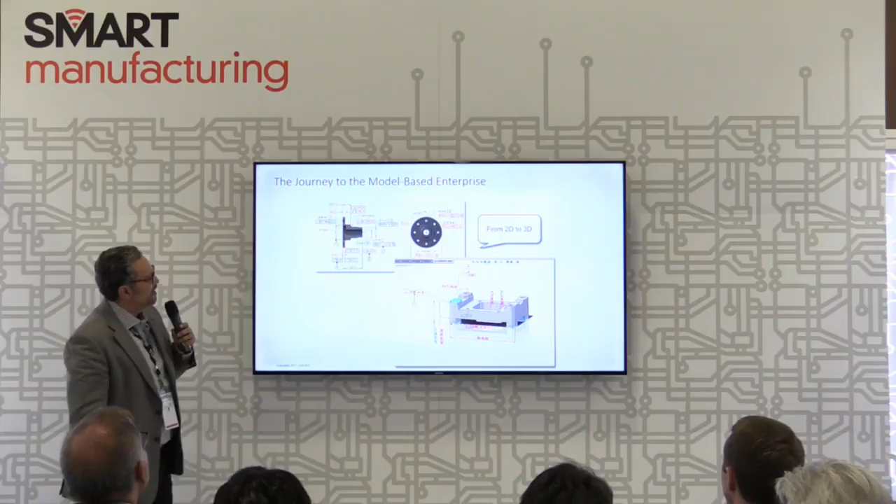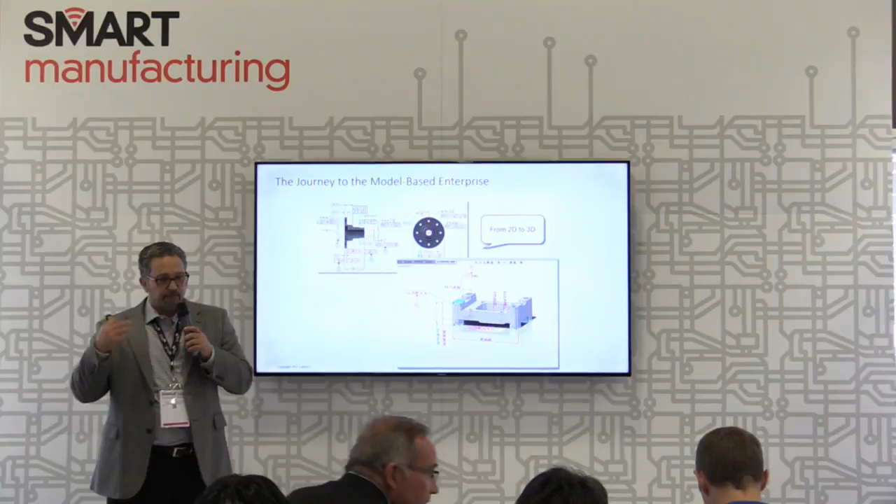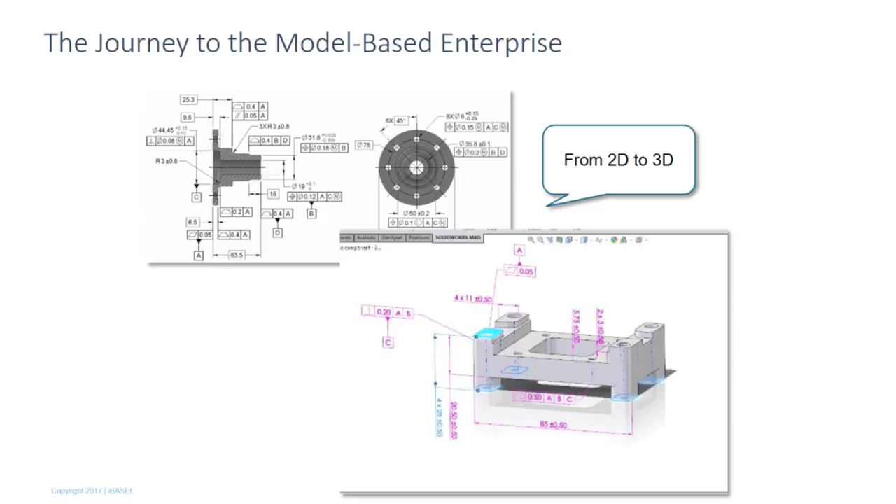All this fascination with the digital thread is really about leveraging 3D models. We have been working for the last 40 years with processes that were really designed around blueprints and 2D drawings and sheets of drawings and rolls of blueprints. And we've laid out a journey, a plan to leverage 3D model content, not just in engineering, but throughout the enterprise. And we're still in that process of going from the drawings to model-based definition to a model-based enterprise. So we'll be more specific about how we do that.

I went too far. Okay. Not cooperating with me. Okay.

So the model-based enterprise has been defined by aerospace companies to be a journey. A journey from those drawings to the model-based definition, the model-based manufacturing, all the way to the model-based enterprise. And along the way, we have more use of the 3D model, and we have more structured handover of that model-based definition from one department to the next in that digital thread. So let's talk about what that looks like.

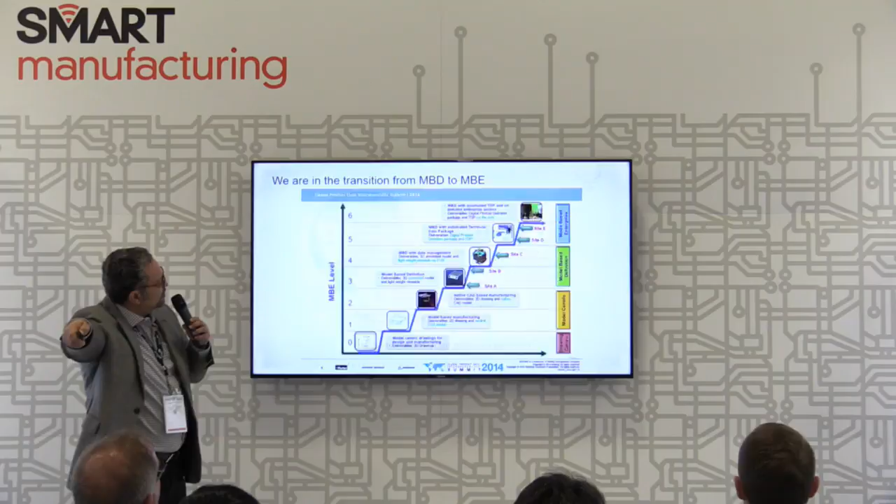If my pointer cooperates. Okay.

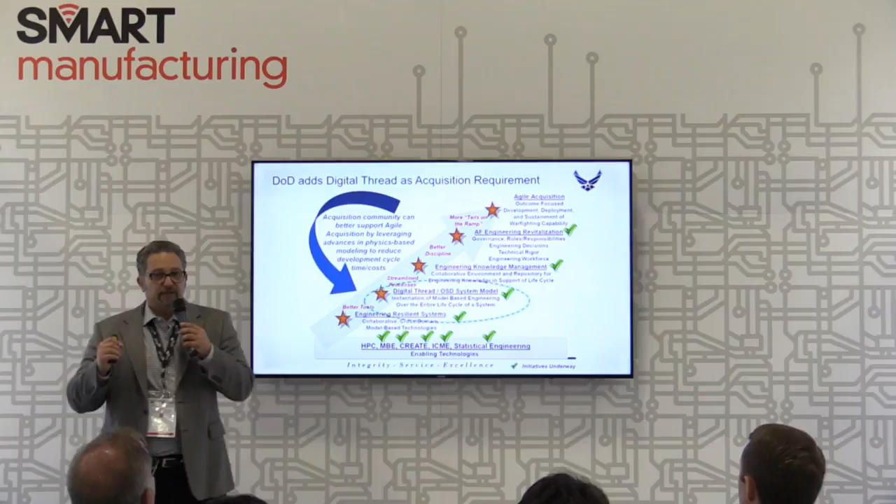So the digital thread has become a requirement on DoD contracts, and is now being called out in a lot of the requests for proposals, because the DoD recognizes the potential of this information, the digital thread, the digital twin, and what it can do for productivity down the line.

Along this progression of leveraging that 3D content, we go from illustrations that are based on the 3D to 3D animations to augmented reality. I'm going to show you some examples of what we're doing there, which is pretty cool. Not only can we deliver this through tablets, layering that 3D augmented reality on top of the real product, but we can also do it through smart glasses.

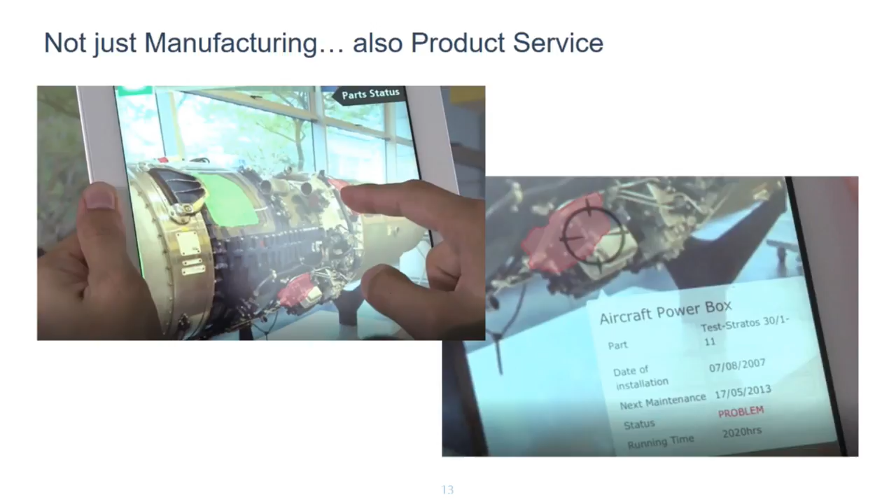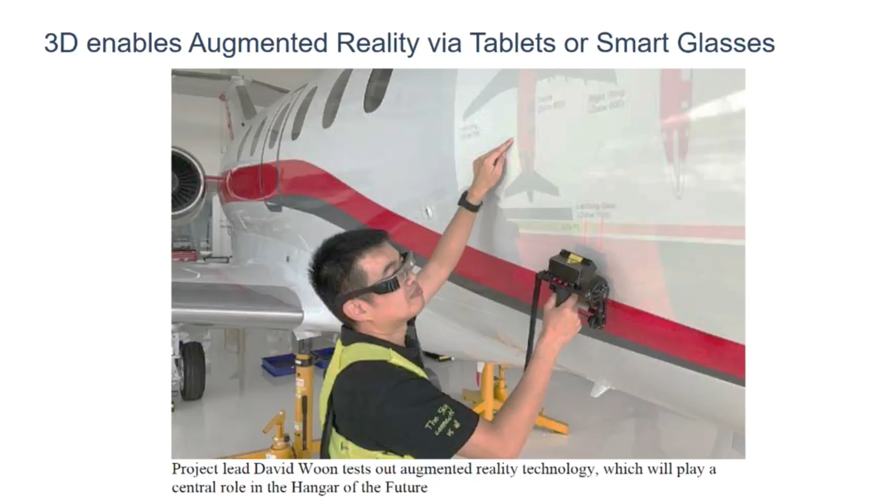Smart glasses that will let us project a layer of augmented reality on top and give us things like work instructions without having to use our hands. And then input is done through voice. And all this technology is becoming really practical to deploy.

But before we show you those examples of what we're doing today, the leading edge stuff, let's take a step back and look at where we came from. We came looking at the manufacturing plant process and the product realization process, all the way from receiving to manufacturing, inspection, assembly, all the way out to delivering a product to the customer.

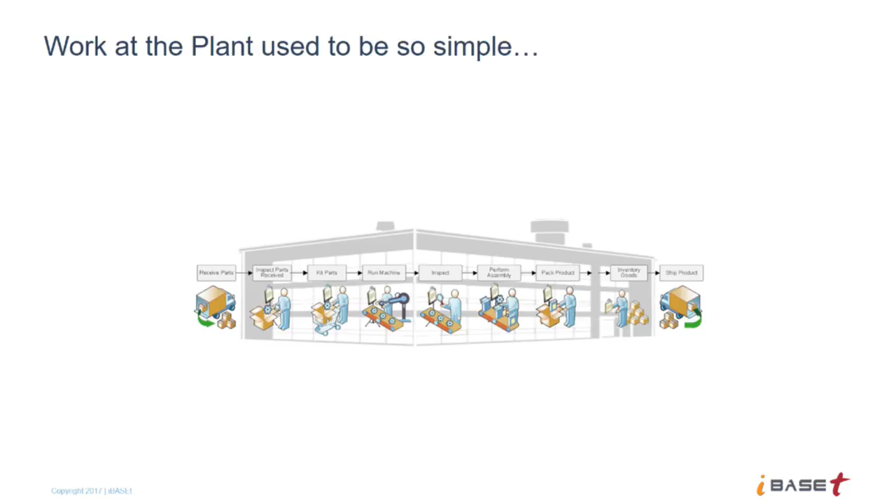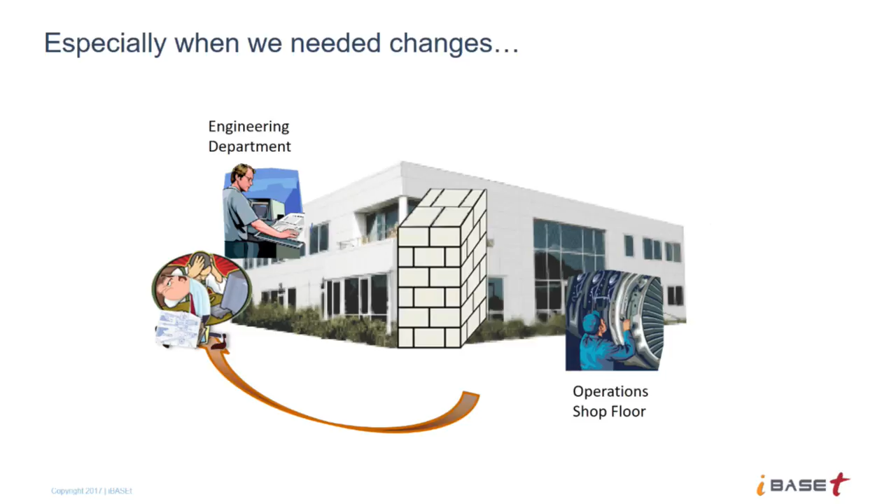We really designed the processes with a hands-off, over-the-wall mindset many, many moons ago. But in many places, we still have that legacy of throwing drawings over the wall. Now it might be a 3D model, but still, engineering designs a product, and manufacturing goes and figures out how to build it. We're moving away from that, but some of that heritage is still there.

And the formats, the systems used here and systems used there, are not the same and not yet very connected. And the feedback loop was heavy on quality engineers or middlemen, liaison people talking to engineers. We didn't have a lot of the engineers working on the shop floor, especially in the bigger companies.

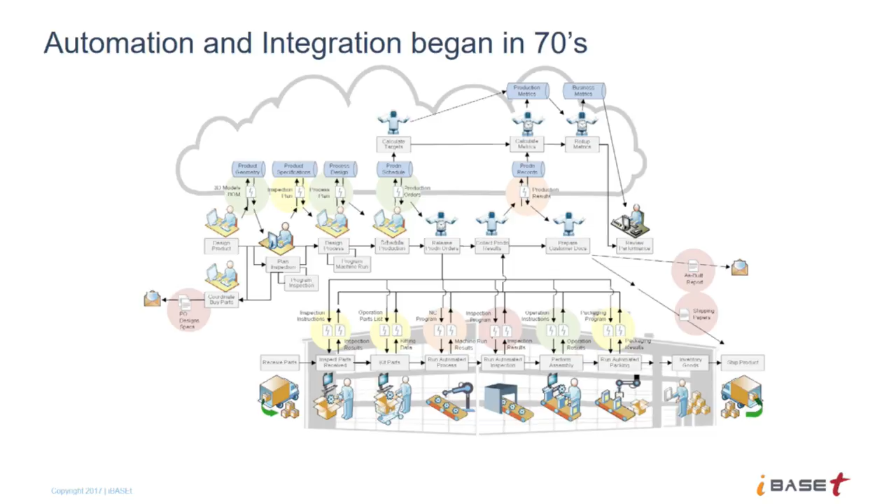Then in the 70s, we started bringing PCs into the shop floor. And we have things like CAM, NC control machines, SPC, a lot of spreadsheets, really, that we started developing for manufacturing. And in the 70s, we moved a little more from paper into using computers and PCs and more computerized programs, but still a lot of manual translation between the engineering content and the manufacturing content.

So no direct way to take a CAD model and convert it to CAM, no direct way to convert it to an NC program, a lot of manual effort in between. So that means a lot of manual reconciliation and a lot of opportunities for errors. So what we want to do with the digital thread is take the next step. You saw all those yellow and red zones. We want to turn them into green.

And green meaning that the path of information between these support organizations and the shop floor is really a digital path of structured and parsable information, so that the sending system, the engineering system, can send information, and the receiving system, CAM, MES, inspection systems, coordinate measuring machines, can take that information, parse it, and use it to create the program to make a part, inspect the part, and the instructions to put it together in a way that we maintain associativity.

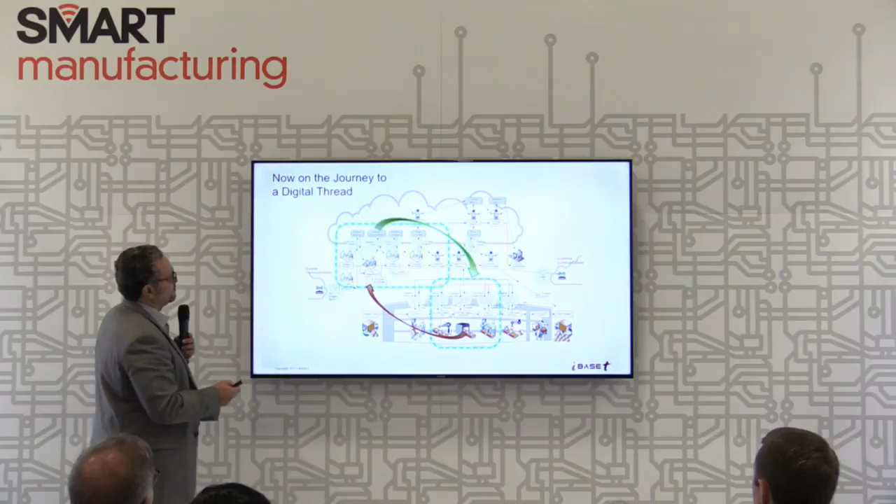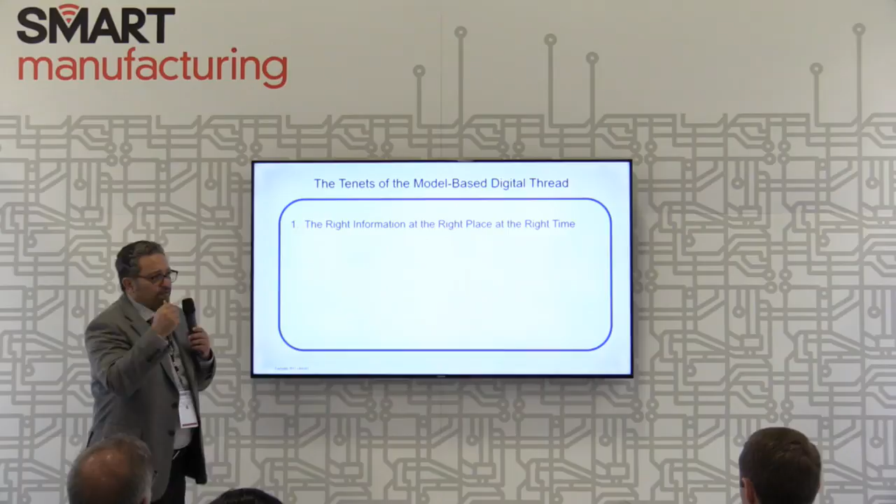Let's look at what those tenets would be in the digital thread. It would be the right information at the right place at the right time. That would be an important tenet for this process. Right? So not only can you get information by going on a computer and looking it up, but I shouldn't have to look it up and search for it and find it. I should be able to, because of my task, have all the information I need linked to it right

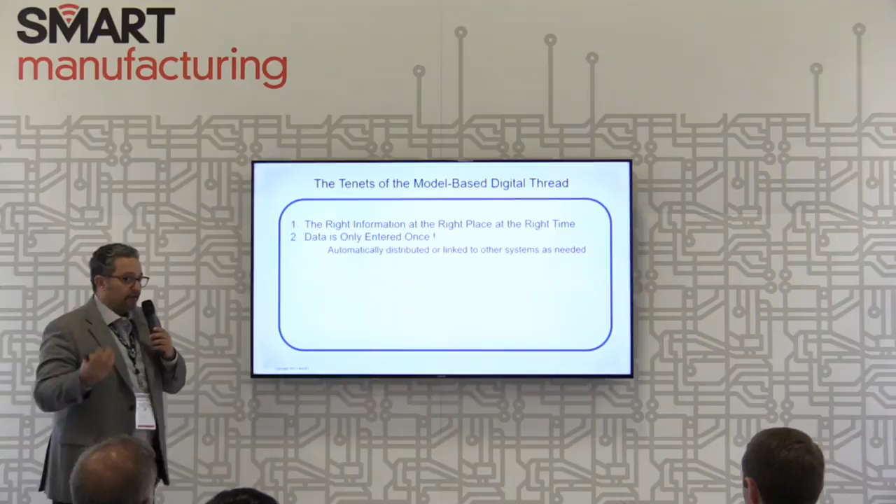there at my fingertips. Data should definitely be entered only once, and that includes the geometry, that includes the specifications of the geometry. If there's a measurement, I should be able to drag it somewhere and say that's the basis for this inspection, not retyping that number and have an issue with accuracy, with unit of measures, and miss something in the translation.

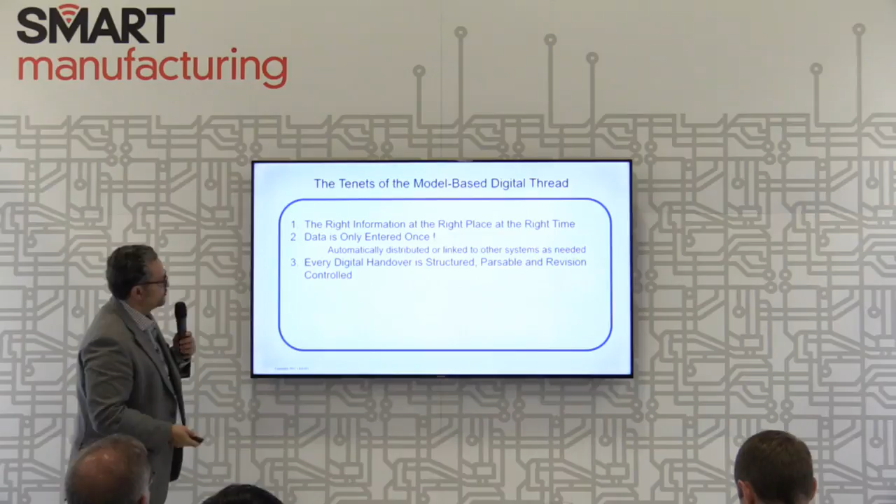So the digital handover has to be structured, parsable, revision controlled. So we need to move to where it's structured XML, JSON, but some structure where we can tell that this piece of information is identified a certain way and is tied to a certain revision control in engineering, so that when we create the downstream processes, we maintain associativity to those objects.

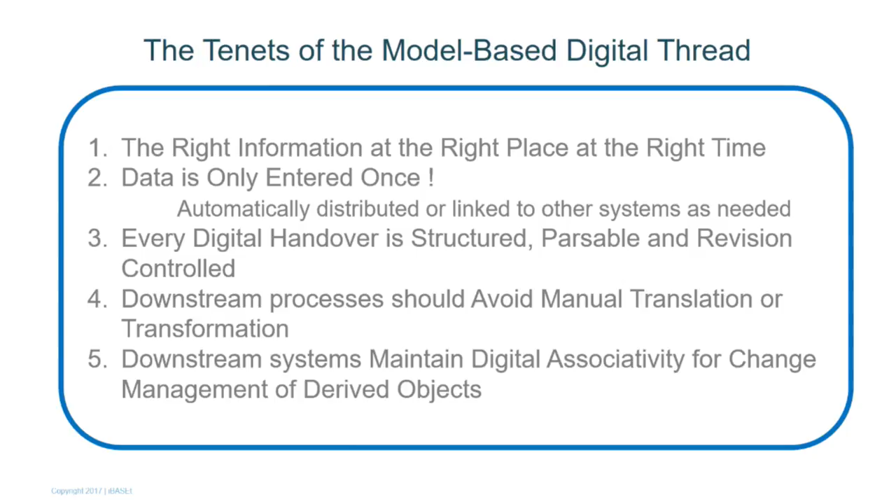So the change control process is very important, that derived objects from upstream maintain associativity so we can apply changes quickly, especially when we're building a very complex product with thousands of parts, with 20 levels in the bill of material or more. We want to know that out of those thousands of parts, only these few dozens were changed in that last change, so we can focus the change downstream on those objects.

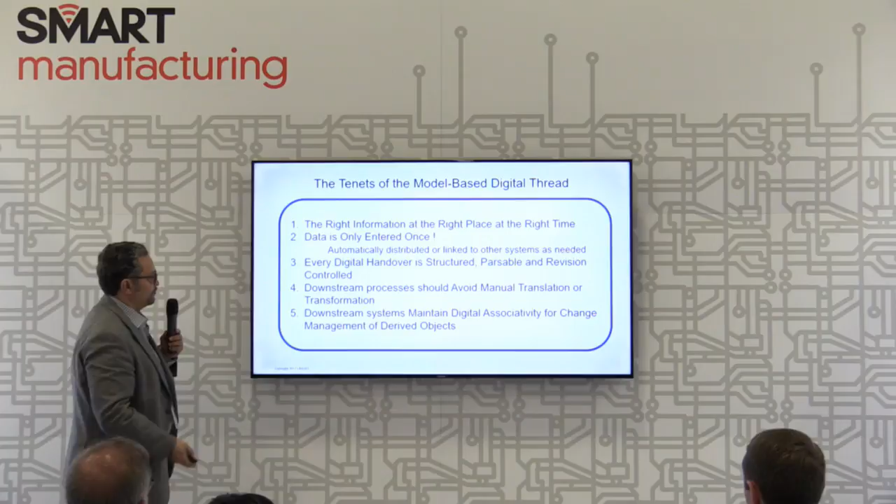So what's our solution for that? What we have found and iBASEt focuses on is adding execution to the product lifecycle management, because that handover of information really starts falling through on the execution side on the shop floor. And that is an enabler to that real-time enterprise, all integrated, connected, all model-based. What does that look like? Well, that product realization process from requirements, supplier management, production to services in the supply chain.

When we look at that process and we drill down into the different roles and what happens at the different sequence, the PLM processes are focused on design of how the product comes together, how the processes go together, simulation, validation. The ERP processes are really focused on planning, procurement, scheduling, and generalizing those buckets. And there's been a lot of progress in those areas. What we haven't had a lot of progress is on execution, and in a way that is linked. That is part of that digital thread.

But the digital thread is not complete, and the product lifecycle management vision is not complete unless we link all the execution. So that when we're doing things in the shop floor, we know that we're working to the right engineering level, to the right specification. So what does that look like?

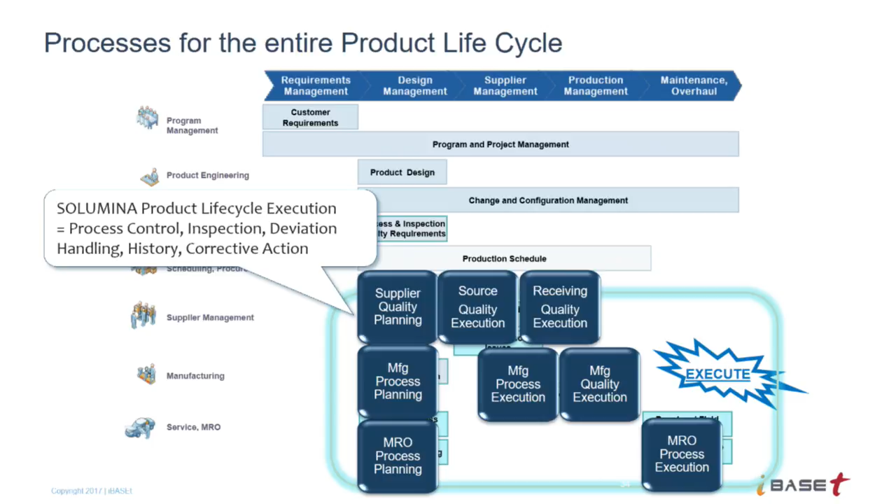And that's where the digital thread, we're going to start telling you how it looks. It looks like a thread. And why is it a thread? It's because the definition of the thread is really on the handover of information. So that handover of that product definition to inspection planning, to manufacturing planning, to services planning. And that handover needs to be in that structured, parsable manner.

But it doesn't stop in the planning and design of the process. It needs to go all the way to execution because that data, and we keep talking about that data and the digital twin and all the actuals, needs to cross-reference to the definition. So how do we make sure that that product we built is built to specification? Sounds simple, but in very complex products, and with a lot of changes going down the line, that can get complicated. So what we've done is drill down on these definitions and handovers of information.

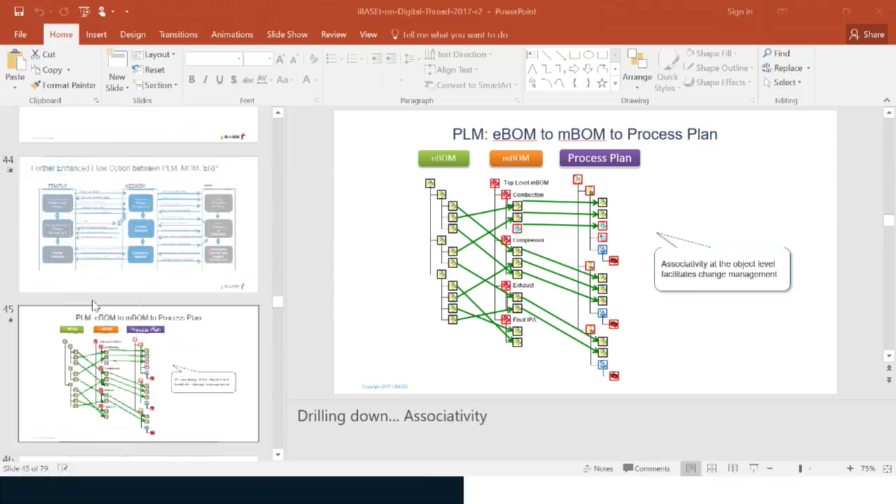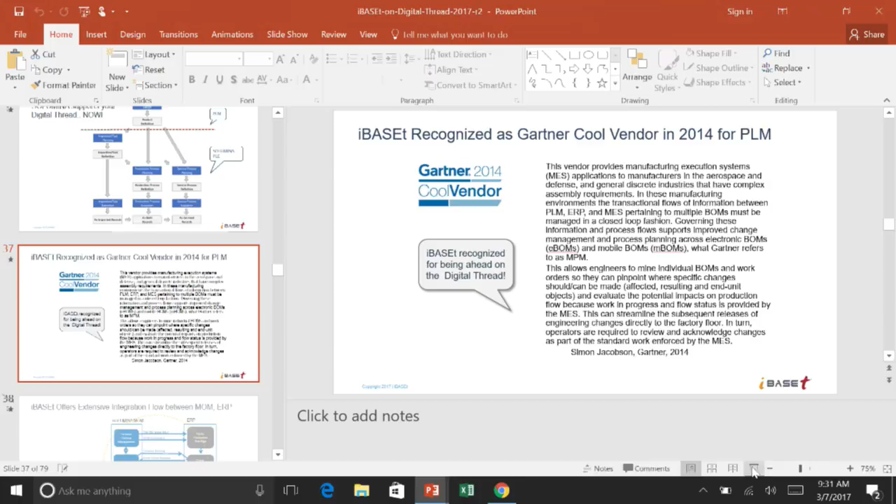Right there, right there. Put me there. I'll take it from there. Okay. I'm sure we'll edit that out later. Okay. Production. You're killing me over here. Just when I got the rhythm going. Here we go. Okay. We're ready? All right. Okay.

So we really start in the PLM system and the engineering definition and engineering bill of material to manufacturing bill of material. And some folks might want to eliminate one of these, but the fact is that we might rearrange a little bit the engineering definition for different types of manufacturing processes. And then we need to define how we're going to build it. The important thing is not to try to eliminate steps along the way.

Well, that's important, but more important than that is to maintain associativity. So these arrows, the digital thread, the arrows, the connections, that's the important thing. That as we move that information, we maintain a cross-reference back to the prior object.

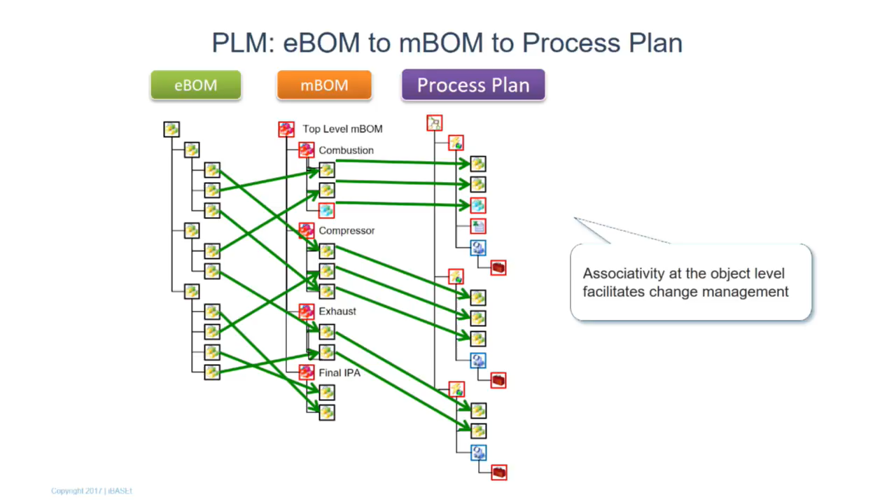And the levels of associativity that we can have now with 3D content, with digital content, are not even close in paper. In paper, it was a document level association, and who knows the objects that we had inside, right? Just a sheet and a drawing number. That was about it for our cross-reference. Now, each object in that PLM definition, when we consume it downstream, we can have a link to that object.

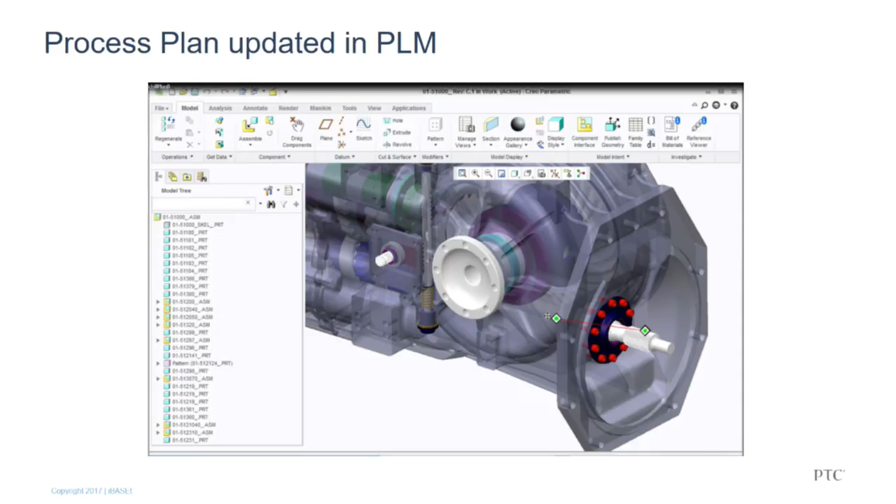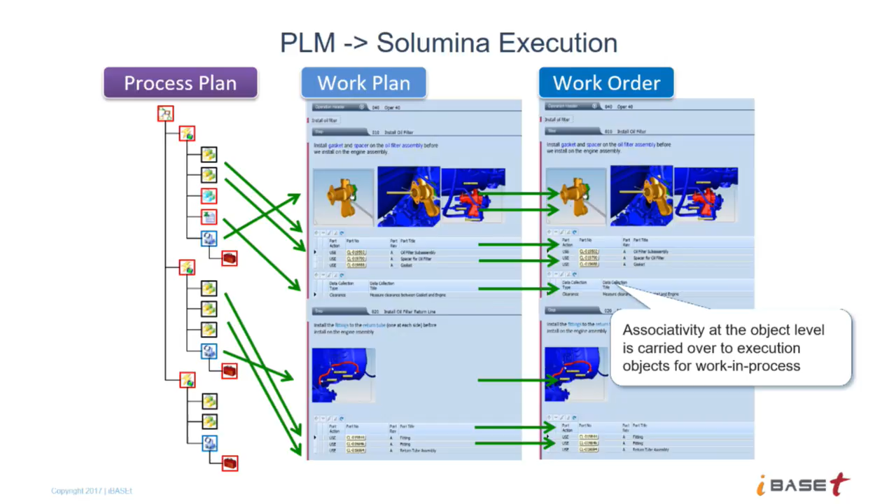So here's an example of some objects in a PLM. So PLM, we love trees. Everything looks like a tree in engineering. Tree structure. On the shop floor, we don't like trees so much. So we go from the tree structure to something more readable, more scrollable, but we maintain associativity. So just because we've changed the formatting and made it a little more top-down, scroll through and get your work instructions, the important thing is that we're maintaining the associativity.

Now, just because you have the tools doesn't mean you're using them right, or that you're using them to their full extent. You can create work instructions and still take a picture of something and stick a picture. But that's not the point. To get the true digital thread, that could be a step, you're getting closer.

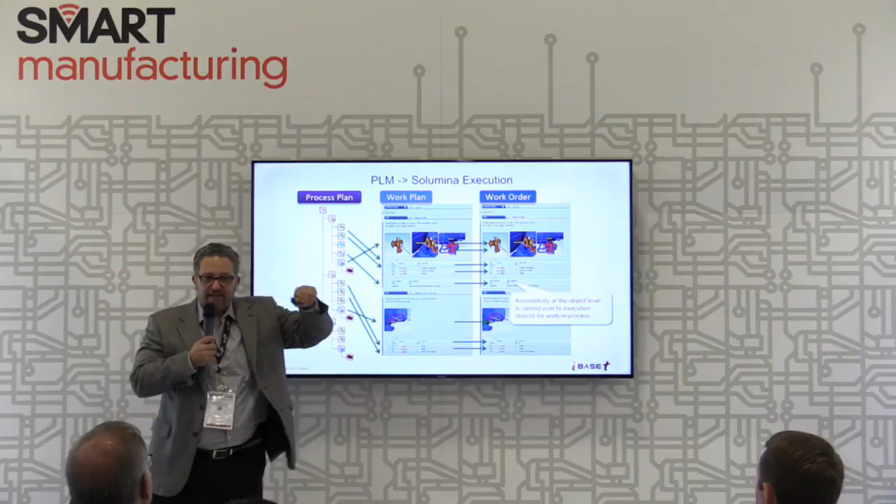But to get a full digital thread, we need those objects linked so that when we get an ECN, a change notice from engineering, we can do an impact analysis and tell you which objects are changing. So that all those objects that came down, the operations, the visuals, the list of tools, the list of parts, are all maintaining associativity. And actually, those illustrations can open directly from the PLM system, and that 3D content has flown through.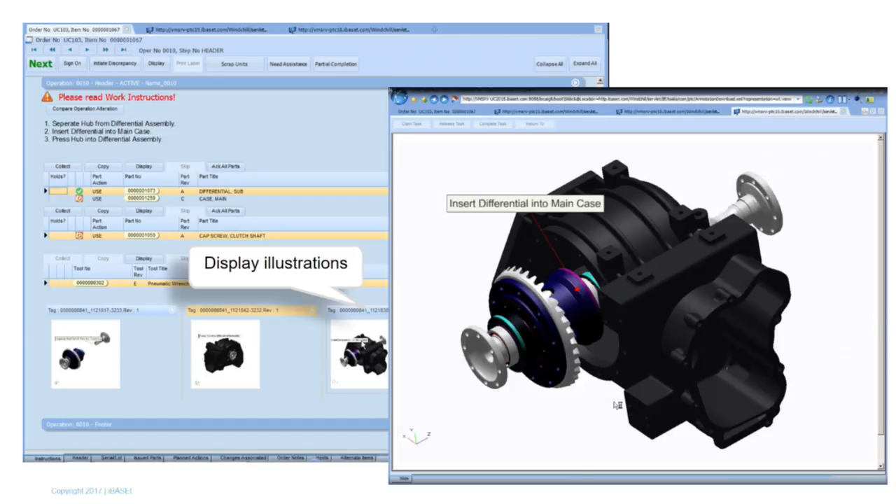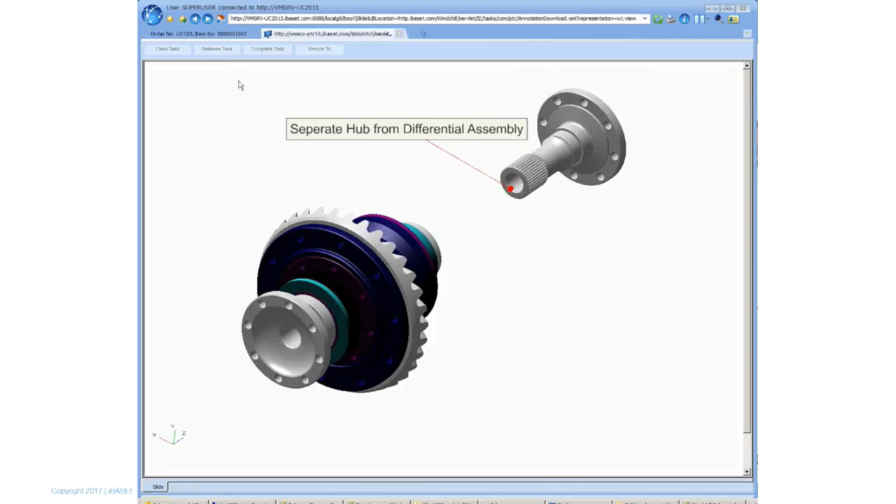So I got a little example here with an integration with PTC and Windchill. So you get a little feeling for how that feels in real life. So we can click on the objects, and then we would bring up the viewer from the CAD viewer and the associated illustrations, right? So this is leveraging the 3D content downstream. It's not creating illustrations in another system, and if we are creating it in other systems, we're doing it by linking to the CAD model.

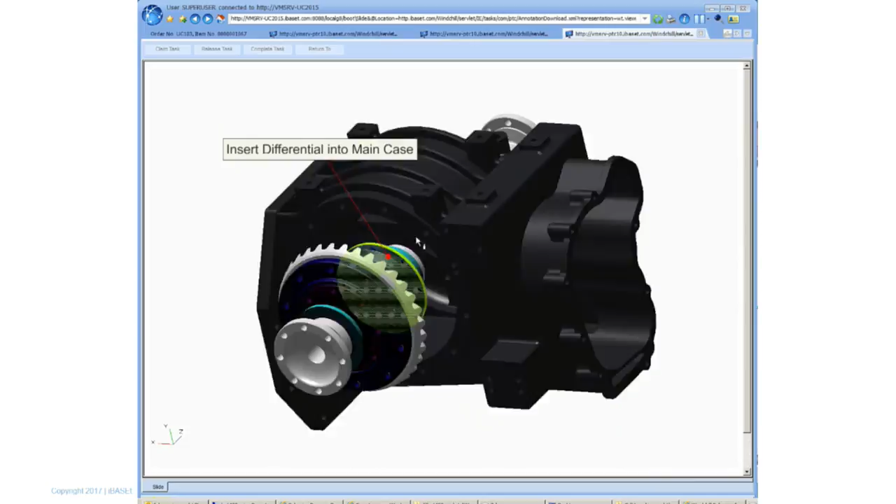Yeah. And in the execution system now, every data collection, all that becomes part of your records. All that engineering information becomes a part of your as-built records too. So that it's not just planning, it's execution, and we know for every ship, every unit going out the door, what engineering level was used, what specification it was supposed to be, and what actually happened. That's a full digital thread.

Now the digital thread is not complete, by the way, so I need to make a note that we're making a lot of progress in the digital thread, but there's still ways to go. So one of the things is right now, a lot of the digital thread projects are heavy on proprietary interfaces to specific products. So we're having to specialize in specific products because the use of standards, like it was talked about this morning, is still evolving. So we have standards like STEP out there, like QIF, I'll mention some.

But the adoption of standards by the software vendors, by the customers, by you guys, the manufacturers, is still in its infancy. That's part of the journey. We're going to move from more proprietary to less proprietary systems and more standardized integration. So that's part of the journey.

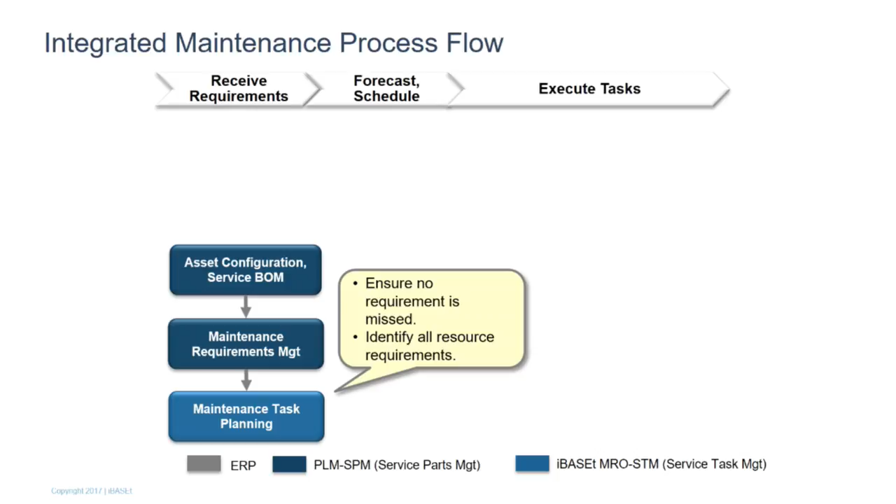So let's look at maintenance, repair, and overhaul. So the thread doesn't stop in manufacturing. All those requirements need to flow from the engineering systems, from regulatory agencies into the planning of services. And we need to use that information to do our forecasting and our planning of maintenance visits. So we go from requirements to forecast and scheduling. And when the product shows up and we inspect it, we might still have some additional work to do.

And then we go into execution. We receive the assets, we inspect it. What else do we have to do? Work scope management. We execute the task. We have findings and we test. Well, all the way when we're testing, what are we testing? We're testing to those requirements, right?

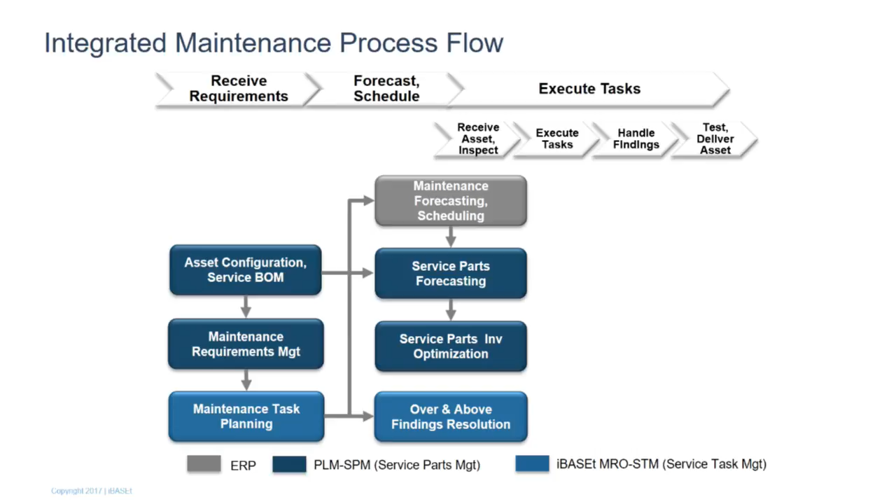They need to flow from the OEM all the way through to the owner, and a lot of times to third-party services, but we need to maintain that thread. So that thread goes all the way to the procurement, to the supply chain, but we end up in execution. When we're executing the task, we want to know the link to those requirements. And the thread is not one direction. We want to look back because we want to leverage all that history.

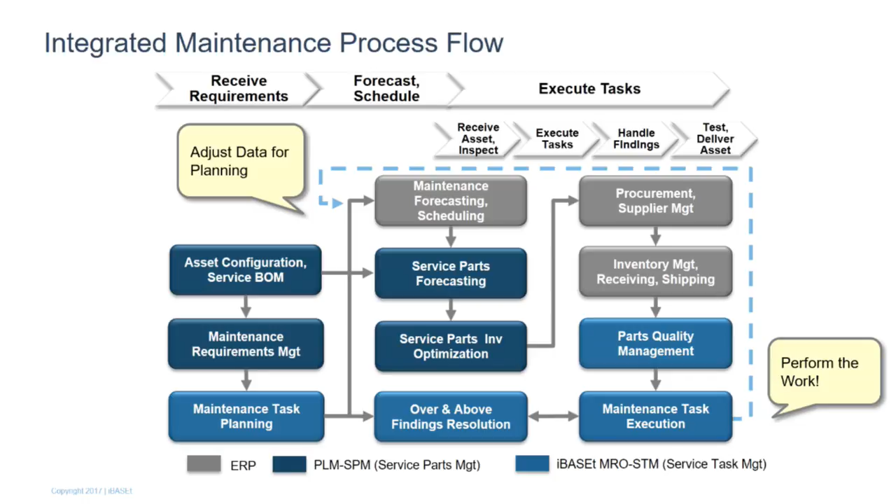One of the benefits is change control, but another benefit is that we can tie the real service life information of how that product is performing all the way to the engineering. And we can find out which parts of the design are performing well, which ones could use some improvements. So that loop back and the leveraging of that information for future programs, for future planning, for design improvements, and future innovation is very important. So what does that look like?

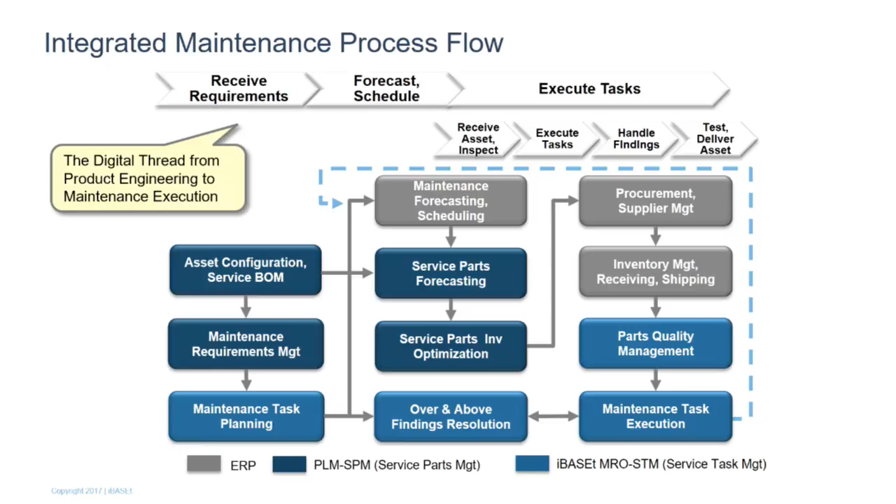What does that look like? See. The top button. Yeah, you want to... You're saying I did it? I don't think so. This thing, the battery is... that button right there. Oh, that's the blackout? Yeah. Oh, yeah. Well. Okay, sorry. Jeez, the most exciting part of the video. Okay, hold on. Let me get it right.

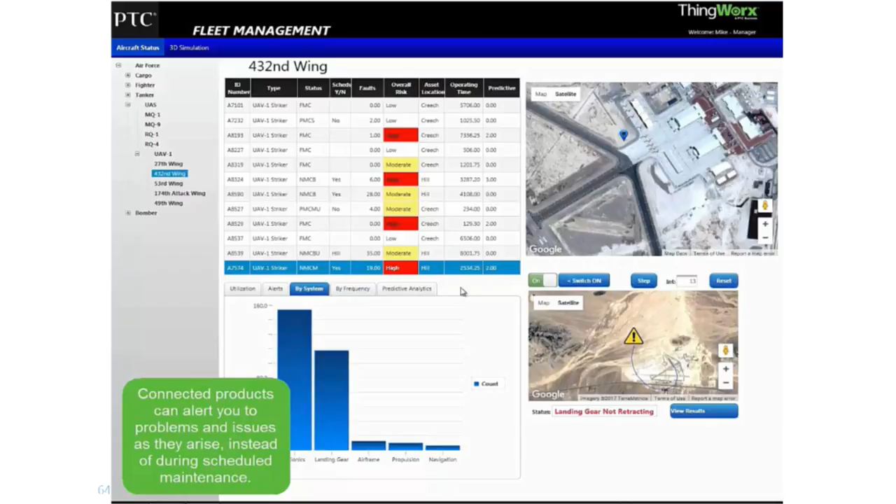There we go. Okay, so here's an example of a services implementation where we're getting that data from the logistics in, and based on the data coming in of the product, we can determine that a visit is planned and we need to create a service order for that unit that's going to come in. In this example, it's a UAV, and we're going to repair the landing gear. So we picked the right jobs. We're going to do the rear landing gear. And we end up with the work instructions based on the plan, and the visuals all the way tied to engineering and the 3D content.

But we're going to kick it up a notch, and we're going to use a tablet with augmented reality. So, the execution. Imagine me with a tablet here. I put it on the unit, and I'm going to use the tablet to guide me through the process. I could not do this kind of work instructions without the 3D. So the 3D model definition is really being used to point on top of the real unit and show me this is the wire harness that I'm going to need to remove, and even what kind of tool I need to use to take it out.

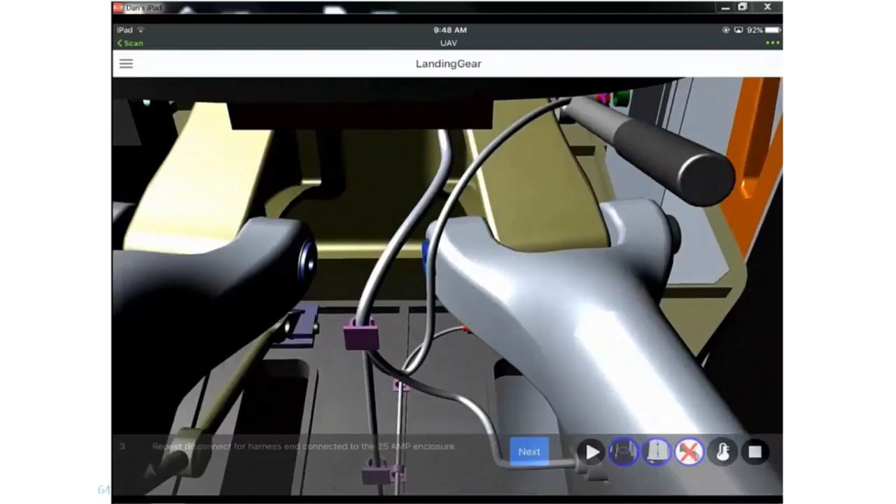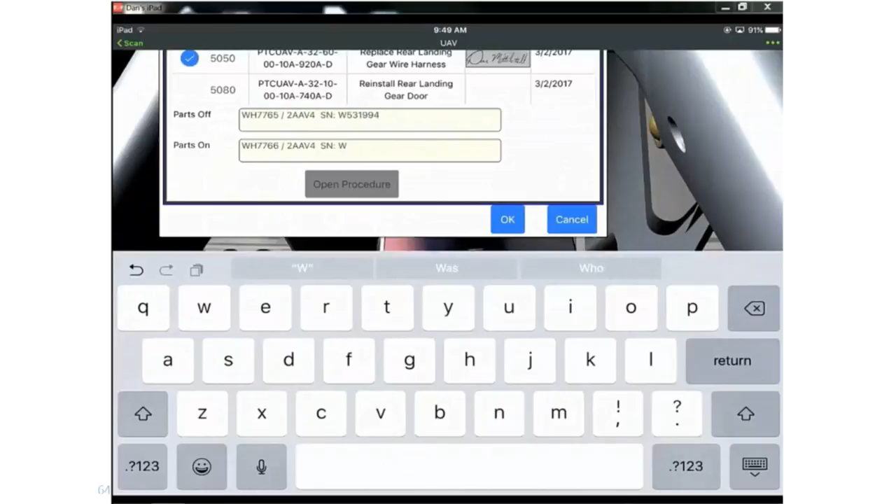So here's that torque wrench. You can see that this keeps evolving and it keeps polishing. But here's the wire harness. That's where it goes. You get the idea of how we can leverage the 3D content all the way down the line into these are the parts. These are the parts that need to be verified, serialized, what they look like. If I'm taking one part out, putting another part in, it can show me what one looks like, what the other one looks like. And then, all the way to the as maintained.

We can here look at that augmented reality. It's updating the database all behind the scenes. So I didn't have to type all this information again. That information got recorded here, and I can see my as maintained, what got removed, what got installed. So in this case, I had a removal and a replace, and that serial number has replaced the old serial number. So all this is maintained in the system, right?

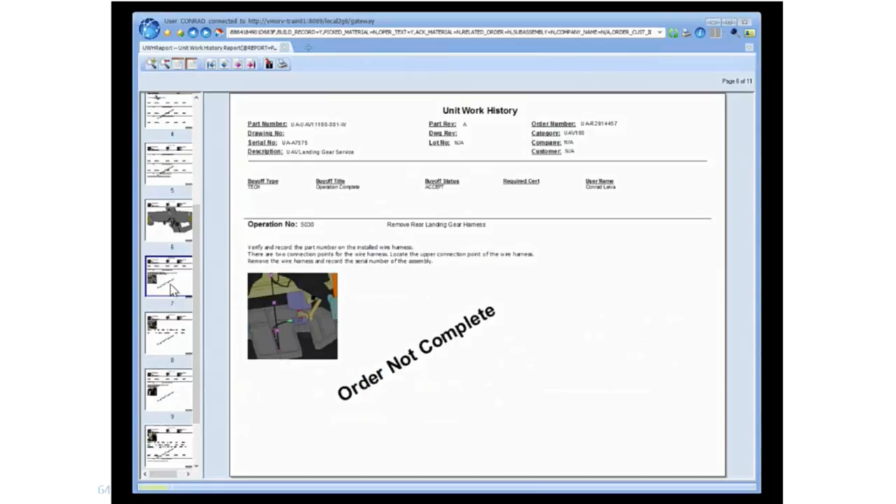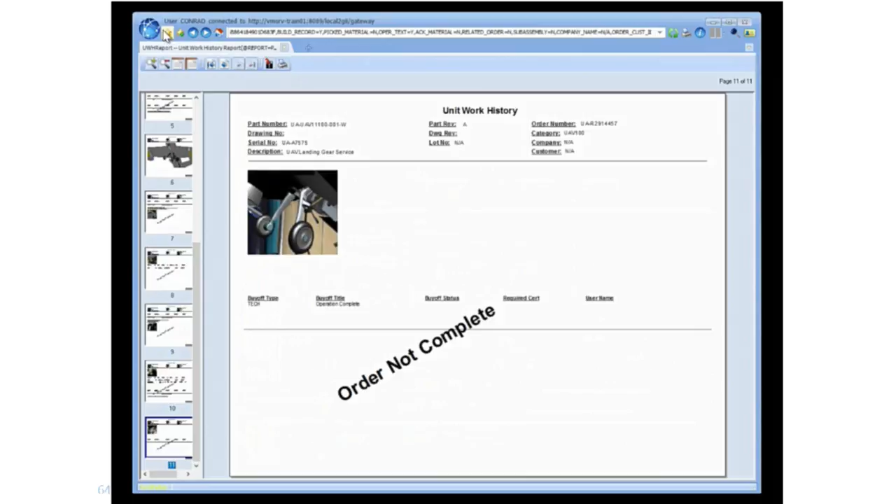So that's a little glance, and yeah, we can print it. We can print it, but the idea is that all that data is online. And these reports are not things we're filling out by hand. It's things that we could print at any moment. More importantly for the digital thread, we want to hand that over to the customer as digital structured information that they can fold into their systems, right? Okay. So how's that? Exciting stuff? Pretty cool stuff, right?

Oh, I did it again. Okay. There we go. Sorry. That button's really ergonomically not in the right place.

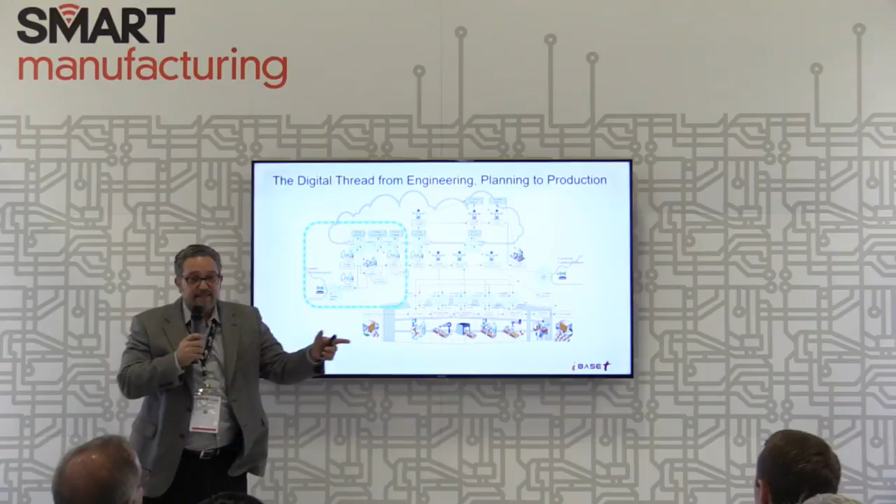Let me see. Okay. So, but the digital thread doesn't stop there. So we went manufacturing, services. It really goes into that supply chain, right? So these organizations that are designing the manufacturing, how we're going to build it, they're also designing the product. About half of what goes into that product, or maybe more, 70%, is in the supply chain. We want that handover of information to also be digital.

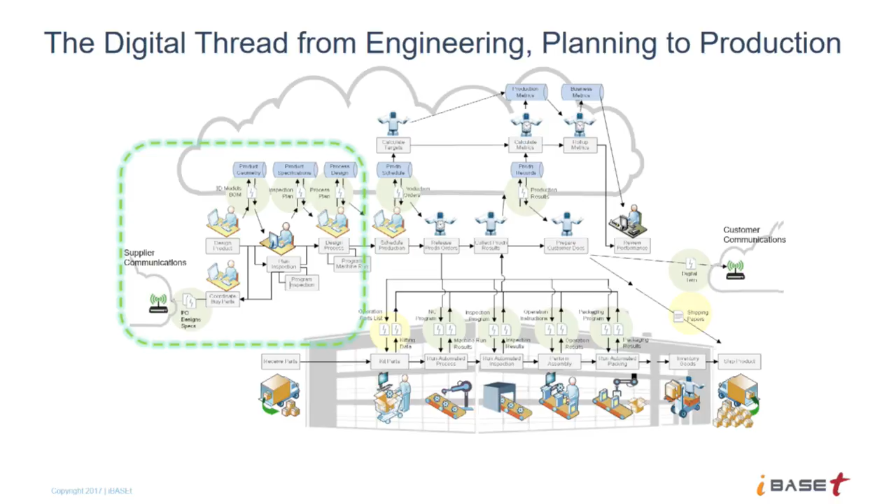Structured, parsable, right? I should quiz you on the tenets of the digital thread, what we want. But we want that information flowing. Now, each layer of supplier has its own processes, its own set, so that needs to be consumed from one engineering department to the next engineering department to the next engineering department. You can kind of see the chain.

In a way that when I get my requirements back, I can cross-reference. When I get my data back, my actuals back, I can cross-reference to the engineering. Okay? And ideally without a lot of manual checks along the way. So ideally, that supplier, when they're inspecting the product and verifying it, when they give me the data, that as-built, as-inspected information folds up into that tree.

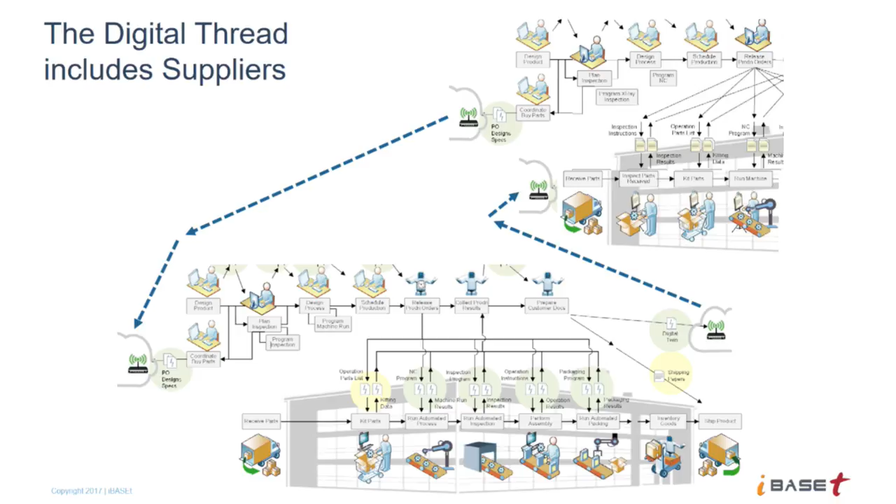So the digital thread is not just within my organization, it's into the supply chain and rolled up, down and up. Okay? So we want to maintain that thread. And we're working a lot with standards organizations like the Open Applications Group that are working on the standardization of messages to go down and up the supply chain. Because at the end of the process, we want an as-built report, a device history record that folds all that information from all our critical units into our final assembly that we're delivering to the customer.

So some resources here at iBase-t that we have on our website. I'm going to point to some, but there's one talking about this problem and the potential solution and taking quality management to the next level, into the supply chain. So I encourage you to read that and how we are moving up.

And a lot of your organizations have moved from these efficiency-driven methods of working with suppliers and just cracking the whip and lower price, please, to moving to more of a collaborative model with suppliers. The next level is all the way to an integrated value chain for manufacturing. So not only supplier, customer, supply chain, we're building a whole ecosystem that can deliver that full digital footprint to the end user.

So what is your digital thread score? Another paper we have on the website talks about these handovers that you could do, and you could just use our spreadsheet as a starting point for yours, but I encourage each organization to really score their digital thread and start making progress and set milestones along the way.

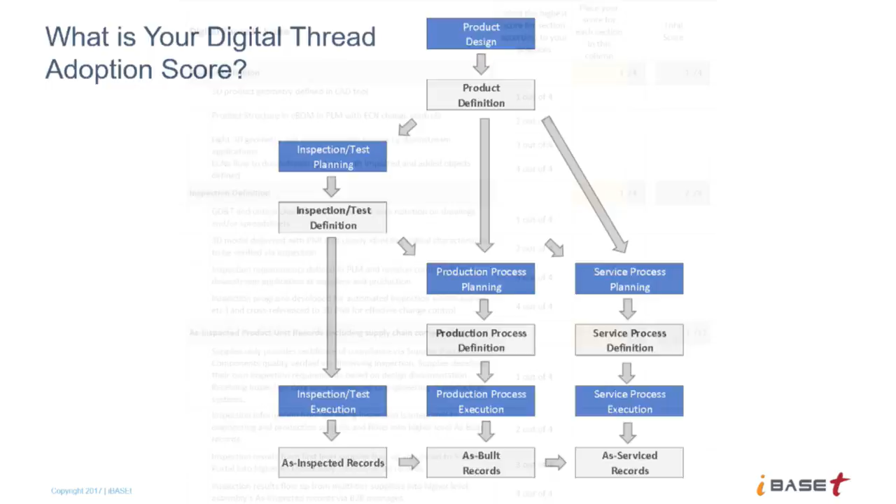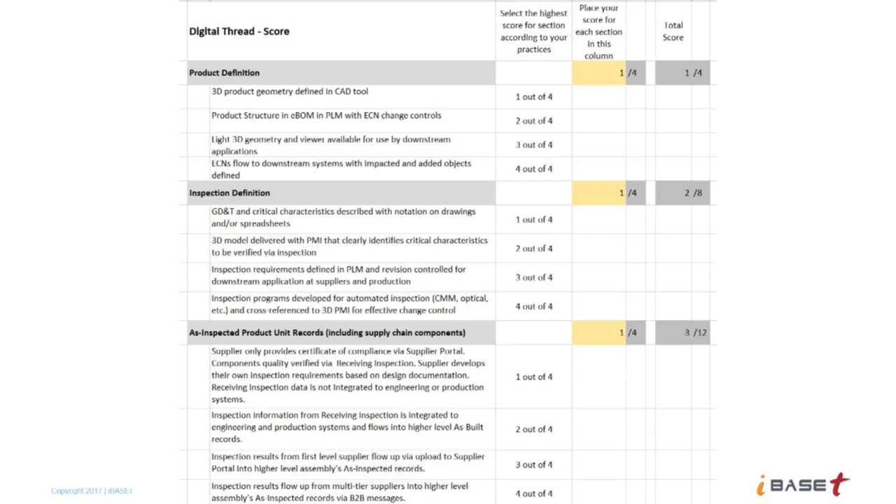Let's look at what that looks like. So you would grab each handover and establish levels. Here in our example, we go between 1 and 4 levels of digital thread adoption, where you are starting with processes that were based on drawings, but still structured, all the way to leveraging the 3D models, and then all the way to using open standards. Where are you in that for the different planning definitions, for the different actuals and relating actuals to upstream data? So it is really a digital thread.

And really look at your organization. Now, you might need help from different departments, right? Different silos in the organization, I mean, departments, to fill this out, but this would be a great exercise for some of you here to really understand where the organization is at and where you have opportunities for improvement.

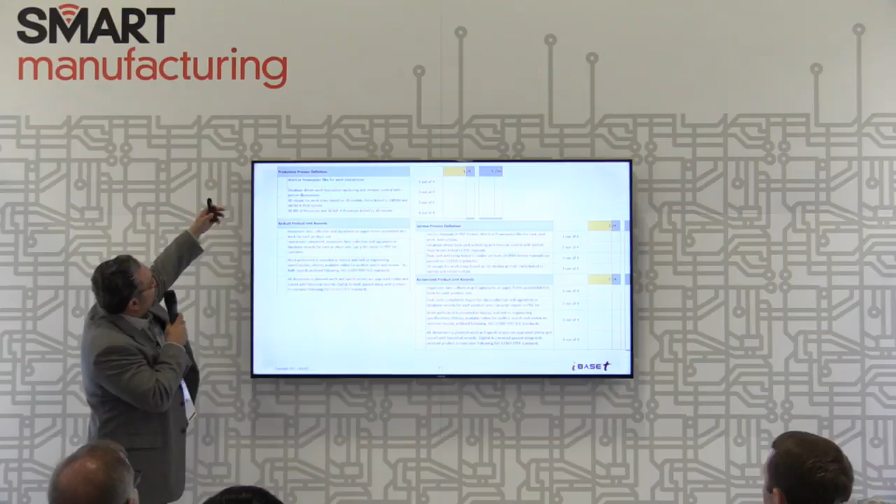Because what is the value of the digital thread, right? Is it obvious to everybody else? One of the values is the fidelity of the information. Errors along the way. If we can have these better handoffs of information, more structured, more associative, we should reduce the number of errors. We should have efficiencies along the way, but eliminating errors would be huge, and speeding up the process, because all those manual translations take a lot of time. So we can go from inspection to production to services and evaluate organizations. Maybe services doesn't apply to you, but definitely manufacturing.

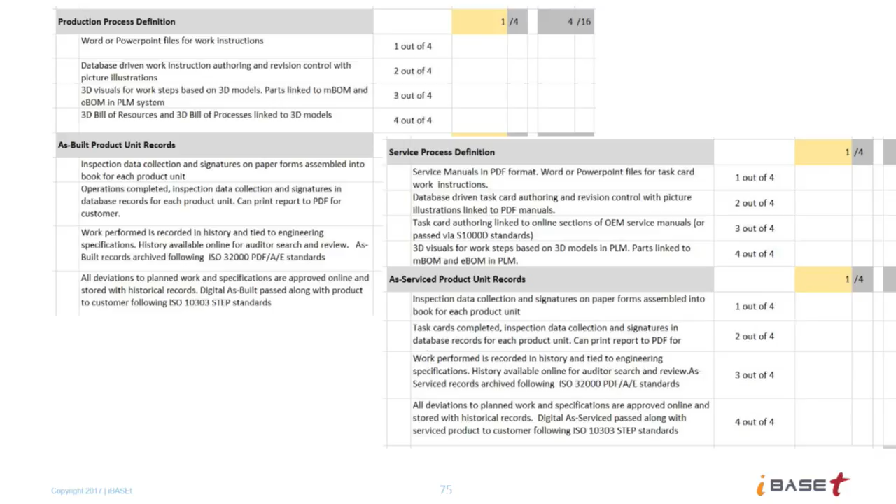And things like adoption of standards, which could be maybe even 3D PDF, that's a standard. But ISO and STEP, ISO 10303 and the STEP standards, and there's many substandards under that. So you can go all the way there and evaluate yourself. What's next? It's the journey. So for example, the 3D PMI, product manufacturing information, and to capture the characteristics, the GD&T, those standards just came out. There's a QIF standard.

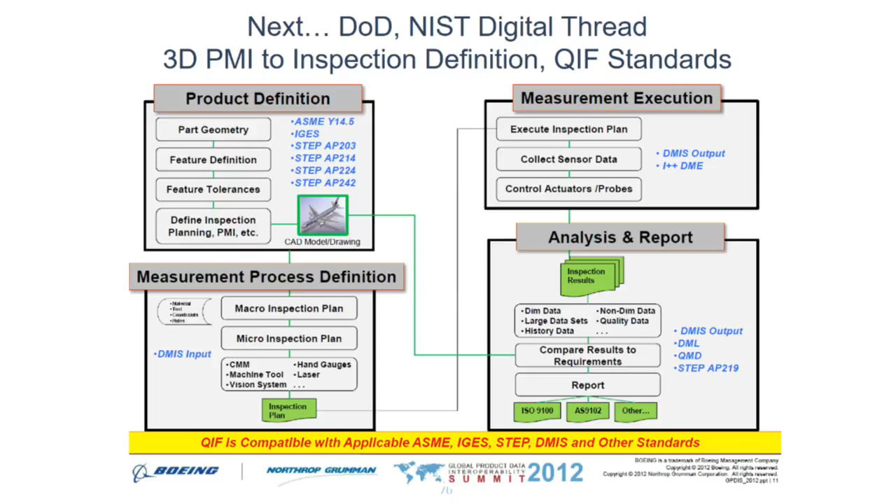Also, there's some very exciting things happening in the leading edge projects, where we're working at taking that engineering information all the way into coordinate measuring machines, into inspection programs, into NC programs, machining programs, and maintaining that digital thread. There's a lot of projects where you've done proprietary solutions. Now we're taking it to the next level and applying standards. Because when we go into the supply chain, is it realistic that the whole supply chain is going to be using the same vendor, the same CAD software, the same machine vendor?

That's not realistic. We need solutions that can cross, that can be multi-vendor solutions, to really achieve a true connected value chain for manufacturing. So stay tuned. We continue evolving. iBase-t is one of the organizations participating in standards for digital thread and continuing to help. This is an evolutionary journey for the whole aerospace industry. So this is the place to make it happen.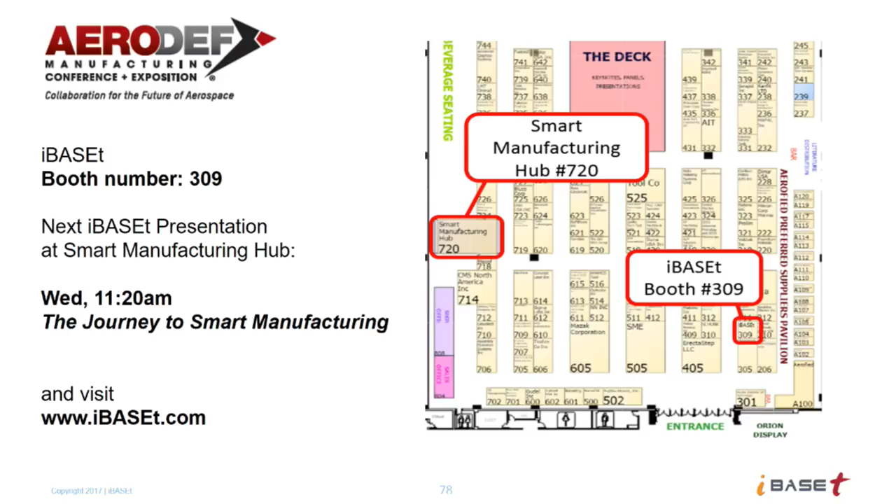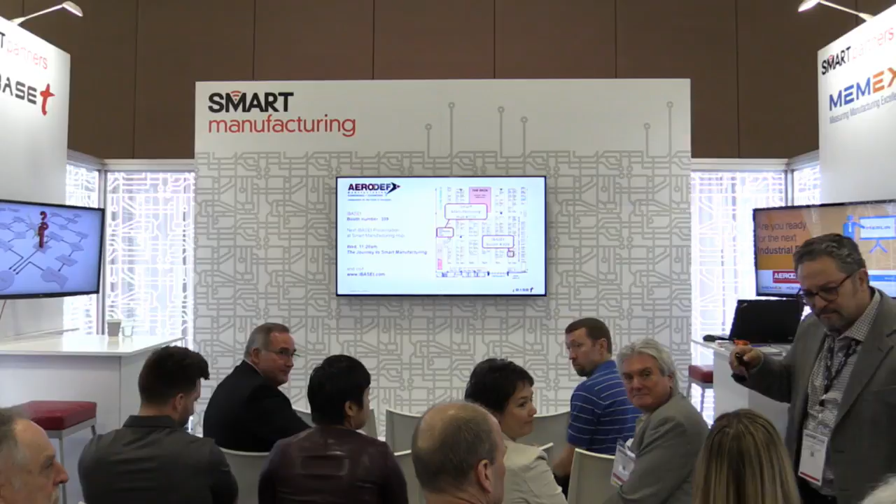So questions? So you mentioned supply chain. In the supply chain for engineering change notices, if there's an engineering change that comes down, will the system also look at the supply chain to say what's being manufactured, so if you've got parts in work, you can make that engineering change effectively at some ship cut-in? You understand what I'm saying?

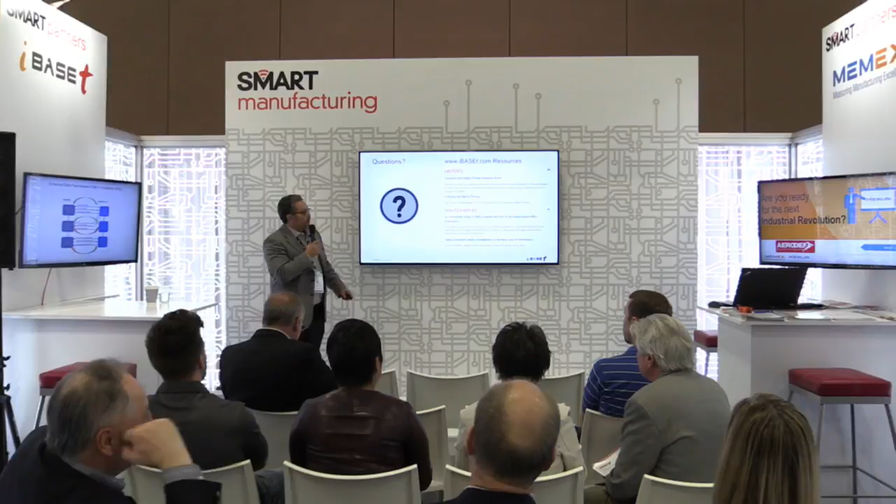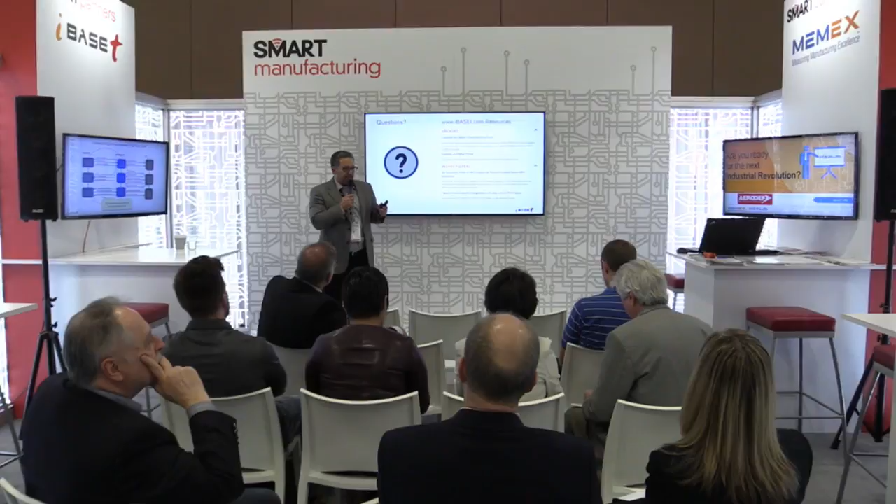I understand. So the question is, are we handling engineering changes flowing into the supply chain today? So no, that's part of the evolution. At this point, we're more in tune with that within the factory, between engineering and the manufacturing system and the MRO system. Our next step is into the supply chain. We're working with organizations like OAGi, where we're defining multiple messages, they call them BODs, defining the inspection definition, relating it to the engineering information, and then a separate BOD gives you an ECN. We need to relate that ECN to all the other objects in a way that maintains the digital thread.

So what's important is, what are the keys between the BOD that transmitted the model, the geometry, maybe the inspection definition that needs to be verified along the way, the BOD that transmitted the bill of material. There could be all these different messages, and we need to relate them in terms of change control. That is really the leading edge, the next thing we're working on in a very structured way. If you do it all within our system, we have a solution. If you're using iBASEt Solumina at one company and the supplier is also using it, we can connect that information. But it's not realistic that the whole supply chain is going to be on one product.

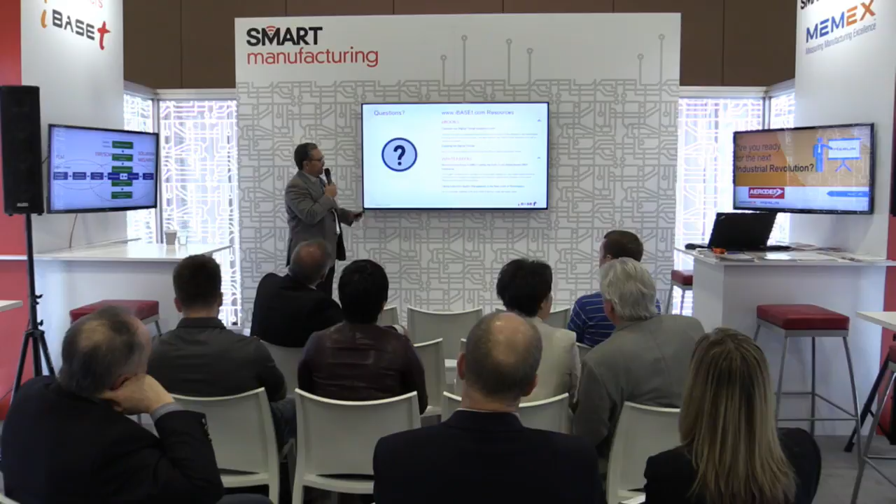So at the end of the day, EBOM to MBOM to completed assembly, does it roll up all the EBOM parts so you can say all the EBOM parts were consumed and you have a completed aircraft? Okay, so do all the EBOM parts for a product roll up so I can tell that a whole aircraft consumed all the EBOM parts? Yes. But this is important. The information in engineering and manufacturing is all associative. We try not to duplicate everything. In manufacturing, you would have used an MBOM that is associated to an EBOM.

In services, it would be service BOMs that are like partial segments, but they need to be related to the EBOM. So we're working with partners that are creating composite apps that can link the information in engineering, because we have the links to the as-built, to the as-maintained, and can provide those composite views if you still want them. You're going to need them transitionally, because that's what we're used to. But our philosophy is that as you go, you enforce compliance to the engineering specification, so you don't need the reconciliation processes you have today.

But we also understand that transitionally, and with the regulatory agencies, they're still going to want those kind of composite views. And we can usually help create those by going into the engineering system. I have a project with PTC ThingWorx that goes into engineering and manufacturing and presents composite views. There's other ways to do it. But we maintain the associativity needed for that.